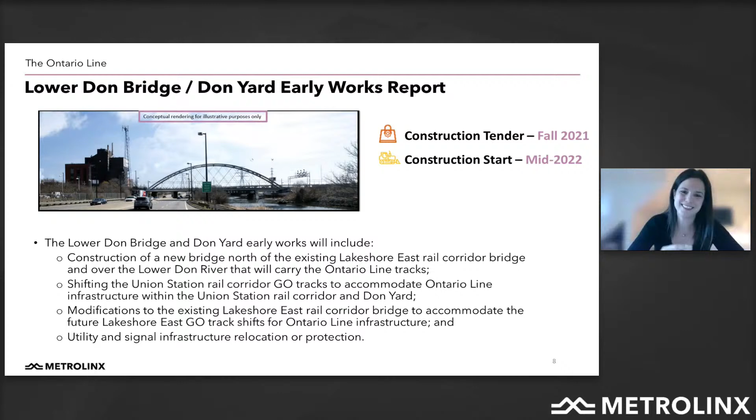The image here is the Lower Don Bridge, which clear spans, actually quite interestingly, from the East Harbour, which you see on the left-hand side of the image. We're looking south along the Don Valley and the Don River here. And on the right-hand side, there's the Don Yard, which you're familiar with. This is a tied arch bridge is what's being proposed. It's a 108-meter clear span.

And the work that's supposed to start in sort of mid-2022, kind of April-May time period, is currently what's scheduled, is the bridge abutments to support this bridge. And we'll start on the east side first and then move to the west side.

And in concert with that, there's some modifications to the tracks and signaling system within the Don Yard itself to accommodate the Ontario Line tracks as they come in, and the portal that goes underground at that point, and also modifications to Lakeshore East of the bridge location to allow the tracks and the construction of East Harbour Station to commence. So next slide, over to you, Carrie.

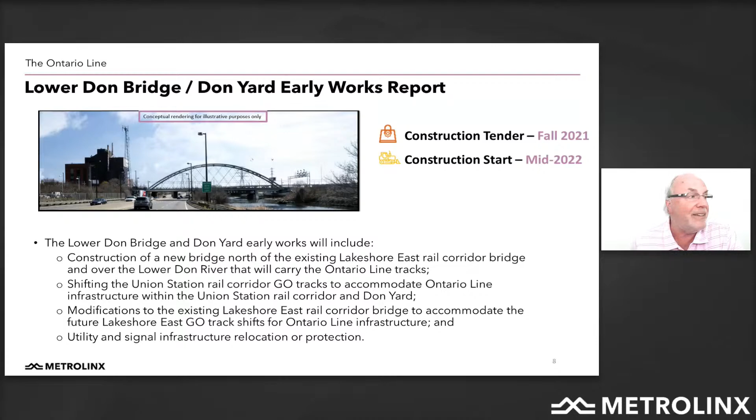Thanks very much, Richard. So as I mentioned, the draft Lower Don Bridge and Early Works EA report was just released this week for public review and comment. And so similar to any EA report that you might be used to seeing, it provides that overview of the proposed work. It assesses the project and all of the environmental disciplines you see here. And it outlines our commitments to mitigation and minimizing any potential adverse impacts.

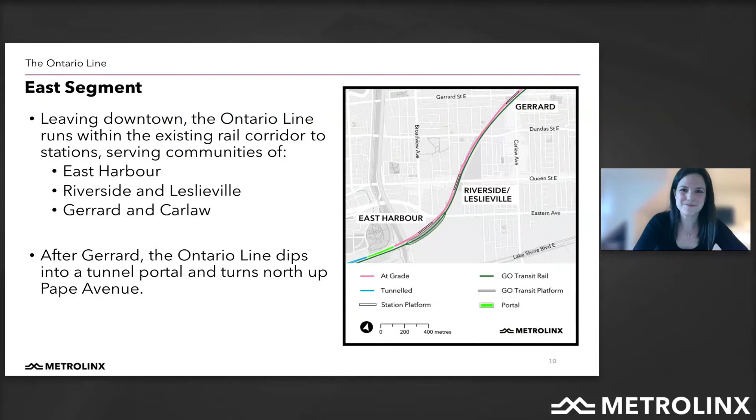So we will be taking comments and feedback on the report for 30 days. So really encouraging everybody to check this out and provide us with your thoughts and comments. Thanks very much. Malcolm, back to you. Thank you very much, Carrie and Richard.

So tonight we're talking about the east segment. It comes out of the ground in the Don Yard and goes across the new bridge at the Don River and goes into a new elevated station at East Harbour, then starts to turn north and goes towards the Riverside Leslieville Station and continues in the joint corridor to Gerrard Station, where it dips and goes underground, continuing up north to Pape Avenue.

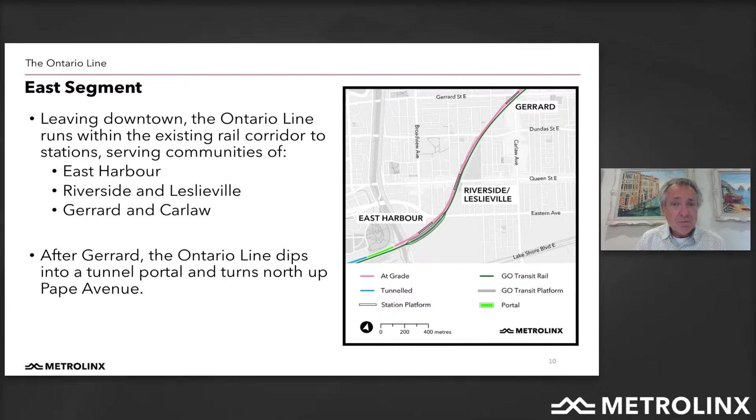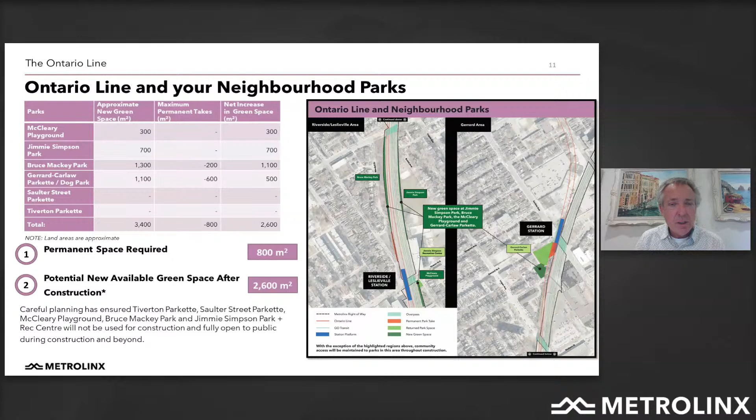On the next slide, we've got some news about the parks. Our construction team has done an incredible amount of work rephasing and restaging the work that's going to be conducted in the corridor to be able to construct most of it from inside the property lines that we have. Each individual park has a net new increase in space. And the total net increase in space is almost 2,600 square meters, which is the equivalent of 2 Olympic-sized pools.

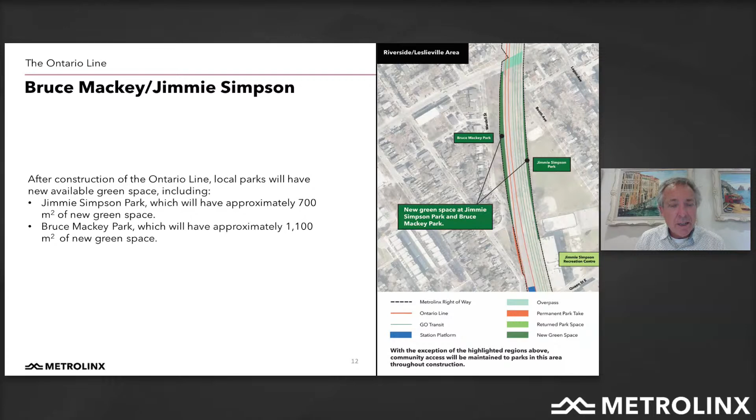On the next slide, we have Bruce Mackey and Jimmie Simpson Park. In Bruce Mackey Park, we'll be increasing about 1,100 square meters of new green space. And that's equivalent to almost an Olympic-sized pool. In Bruce Mackey Park, the additional space varies, but it's up to 7 meters wide, widening of the park.

In Jimmie Simpson Park, we have approximately 700 square meters of new park space, and that is about 3 meters wider generally down the length of the park. We've also installed some survey markers inside our fence to show where the new retaining wall is going to go. You can visit this. They're currently only on the Bruce Mackey side of the alignment, but we'll be soon adding them to the Jimmie Simpson side of the alignment too, as well as at the McCleary Playground.

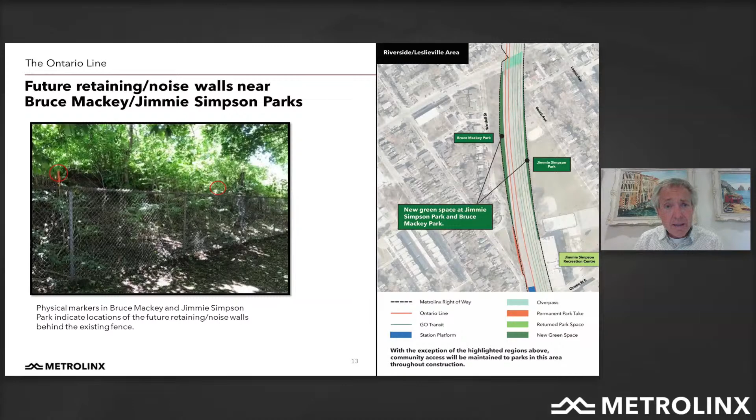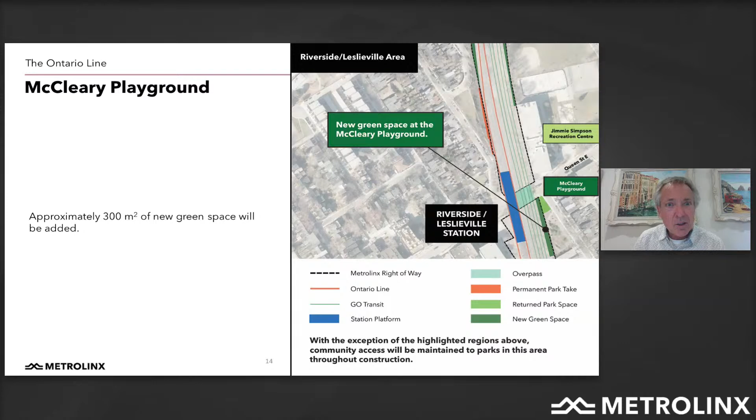And that's approximately equal to a tennis court and a half being added to that park. Next slide. Up at Gerrard-Carlaw Parkette, this is where a station is. And at this station, we're going to be needing a large part of the dog park during construction. But at the end of the day, when we hand everything back, that park is actually going to be increased by 500 square meters, which will create new spaces for programming.

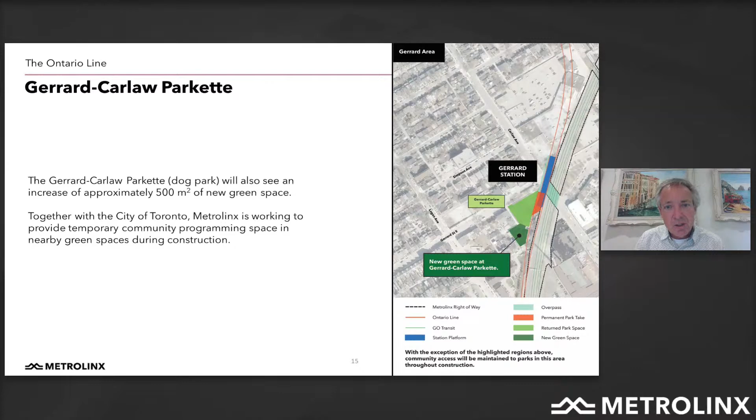In response to this, we're working quite closely with City Parks and Forestry to try and identify other adjacent parks where we can move some of the programming that was in the Gerrard-Carlaw Parkette temporarily to the new adjacent park to make sure that the programming spaces are still available to the community. On the next slide, I'll pass this to Richard.

Hi, Malcolm. Thanks very much. So we're really excited about this particular development. As you know, there were a lot of questions about how we were going to be able to build from inside our corridor, and the very exciting part of this development is that we won't be impacting the park spaces at all. We are actually building entirely from within the corridor, and I'll go on to share with you exactly how we plan to access the corridor without impacting the park spaces.

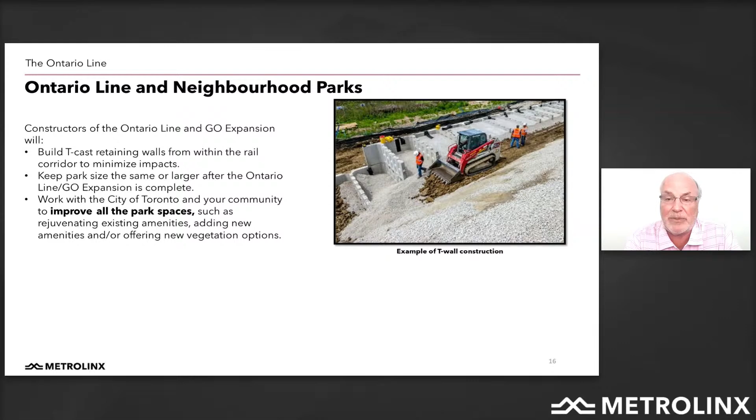In this particular picture, you can see what we call precast T-walls. If you imagine you were standing in the middle of the railway corridor, obviously with your safety gear on, you'd be looking at the construction going on, and you can see these precast T's, the T is lying down on its side. Basically, we put the aggregate around them, and they're self-supporting in this formation, and work for the railway, supporting the railway loads that will be incurred. And we can put noise walls on top of these. Essentially, all the work is being done entirely from within the railway corridor, as per this example. Next slide, please.

So obviously, to do the work from inside the railway corridor, we have to access the railway corridor. As you can see on here, we've marked 8 locations where we'll be needing to access the railway corridor. If we start from Eastern Avenue, at the far left-hand side, bottom of the image, you'll see items 1 and 2, which are basically 356 Eastern Avenue, a storage warehouse there currently, and some access that goes up onto the railway corridor just behind the Saulter Street Parkette using part of the existing lane that's there.

But I should emphasize that all the access is from main streets. We are not accessing any of the construction works from local residential streets. So in this case, we're coming off Eastern Avenue on the west side, which is above the corridor in this picture, and then there's a similar access on the other side of Eastern Avenue by Dibble Street. Number 3 is at Queen Street, you can see the access coming off of Queen Street. And again, not touching the McCleary Playground, but just using an area in that location for the expansion of the Queen Street Bridge. We're rebuilding the Queen Street Bridge.

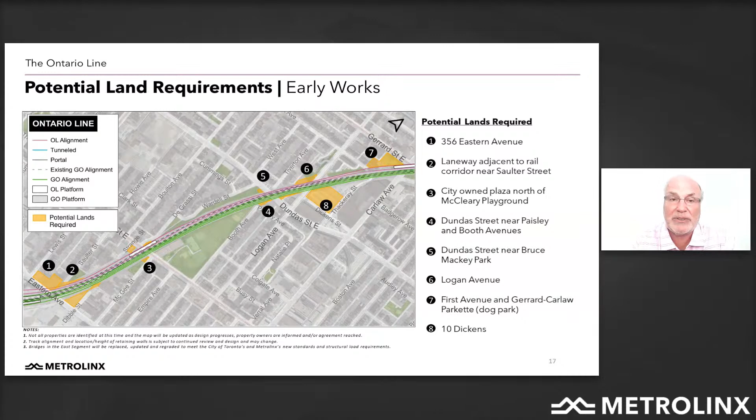Up at Dundas, you see 4 and 5, which are access points there. Number 6 is access from Logan. Number 7 is the Gerrard Street Parkette that we talked about. Number 8 is the laydown area for this construction, and that's an existing parking lot on Dickens Avenue. So we can dive into these in a little more detail. I think there's slides for each of them. So we go to the next slide.

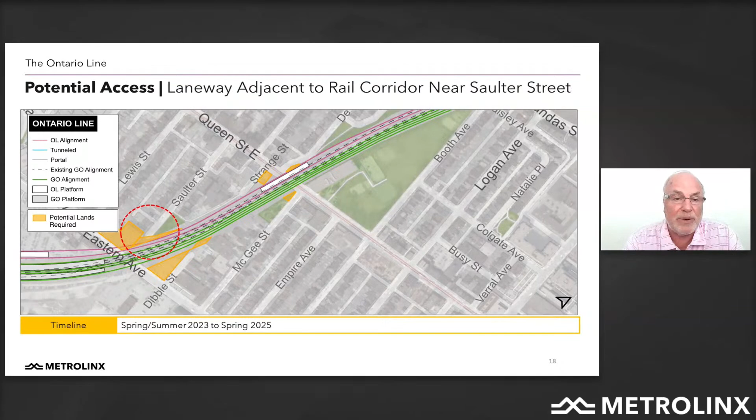Here's that access off Eastern Avenue, and you can see the detail there with the red circle. On either side of the railway corridor, there'll be ramps that basically build up, and the trucks would access onto the railway corridor at each of those points. Again, from Eastern Avenue, main street only. Next slide. This is a quick example of what you would possibly see, and it's hard to see because it's basically that thin white line that crosses the image from left to right.

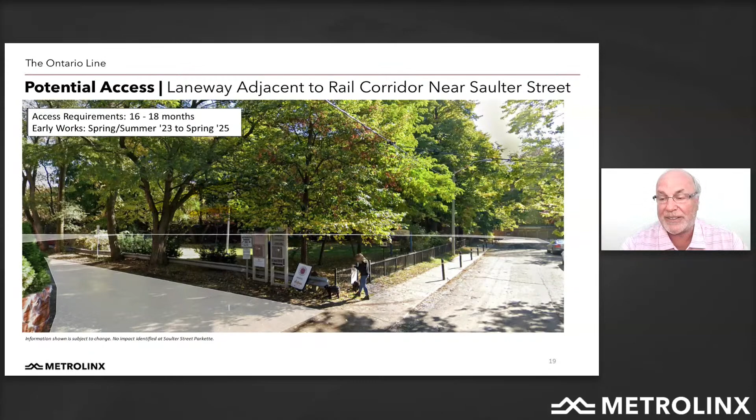And it's basically coming, the trucks would be coming from the right-hand side of the image and climbing up onto the railway corridor behind the Saulter Street parkette. I do have to mention in this image, I noticed an error that there's a white shading in the lower left-hand corner of this image, and that's incorrect. So that area by the woman walking her dog and by that signage there is not required for construction. And this was a slide obviously taken from an earlier version before we managed to figure out exactly how to get onto the corridor without affecting any local infrastructure.

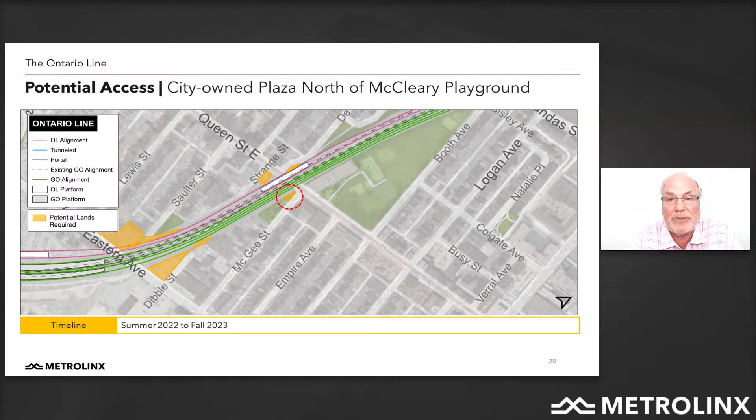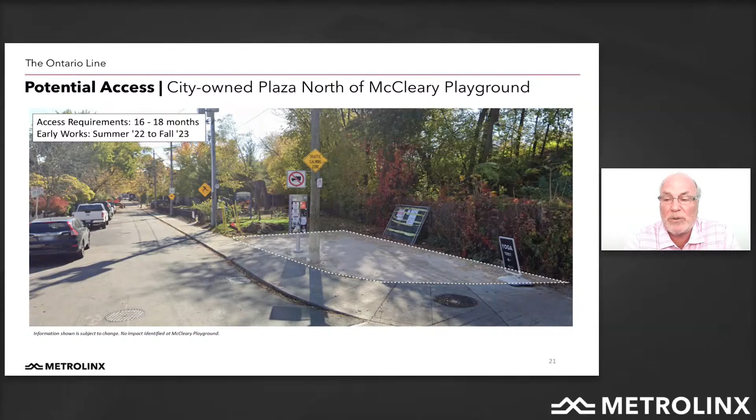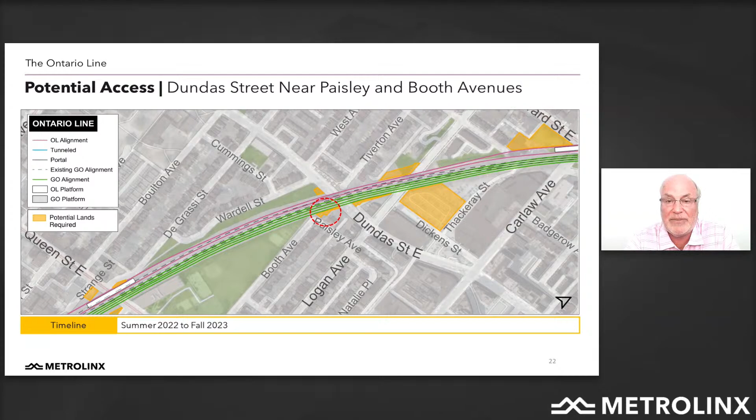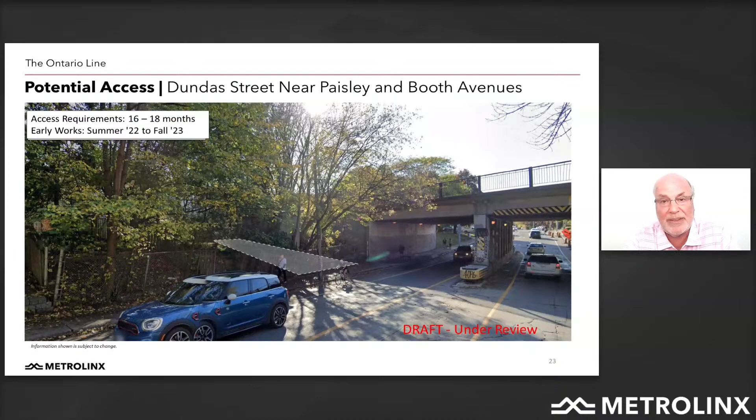Next slide, please. So here we are up at Dundas, and this is access onto the east side of the corridor, so we do not impact Booth Avenue or Paisley Avenue or Jimmie Simpson Park or the Rec Center. None of those facilities will be impacted by this construction, and the Ball Diamond and all the other facilities in the park will remain open at all times. The access here again is from Dundas Street, and the one that is red circle is a ramp onto the corridor, and the one on the north side or the upper side of the corridor is basically for the Dundas Street Bridge. Next slide. And you can see the image of the approximate location of the access up onto the corridor at this point coming off of Dundas. Again, you can see the work here is scheduled from the summer of 22 to the fall of 23.

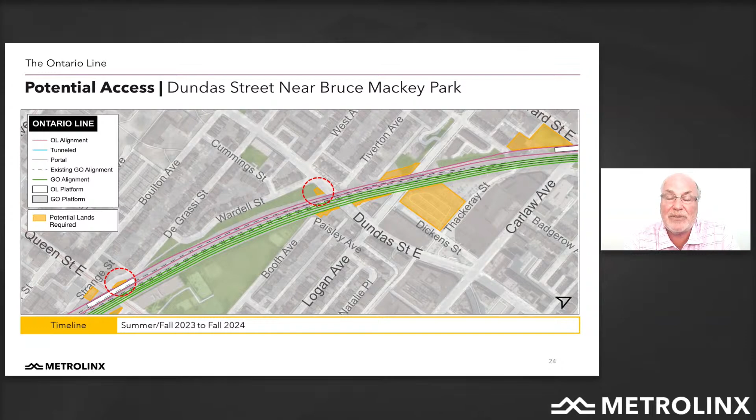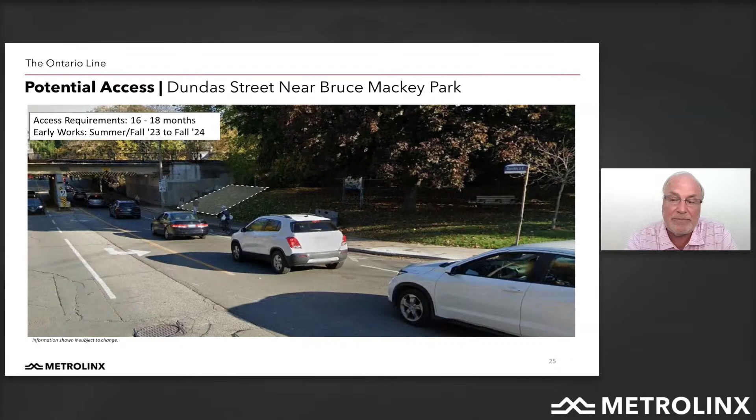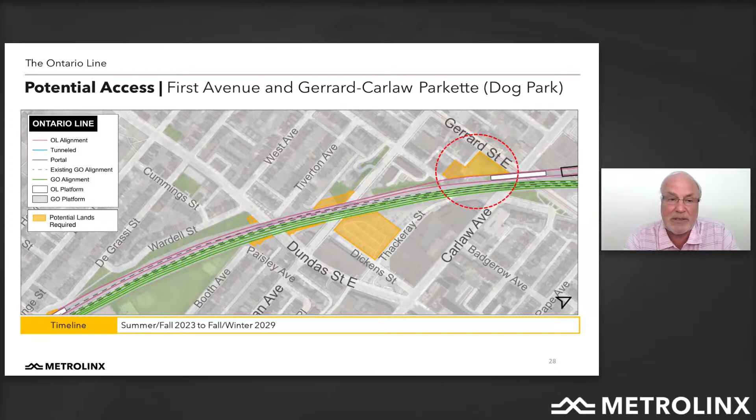Next slide, please. And then we come to the Gerrard Carlaw Parkette. We're talking about access here from fall of 23 through the winter of 29, and that's really for the construction of the station at this location. So if you move on to the next slide, please. You can see that what we're talking about here is acquiring this property. I believe this is on First Avenue and it's shaded red in this particular case. And so we have two sets of works here, the early works, which is the regrading of the corridor and the preparation for the 6-track configuration, goes from the fall of 23 through the fall of 24, followed by construction of the Gerrard station from fall of 24 through the fall-winter of 29. Again, you can see the white shaded area here, which is the Gerrard Carlaw Dog Parkette, and you can see the periods we've been talking about there. The intention is that this land, the parkette, together with the other land from First Avenue, will be put together in a brand new park that will increase the size of this area. So next slide, please.

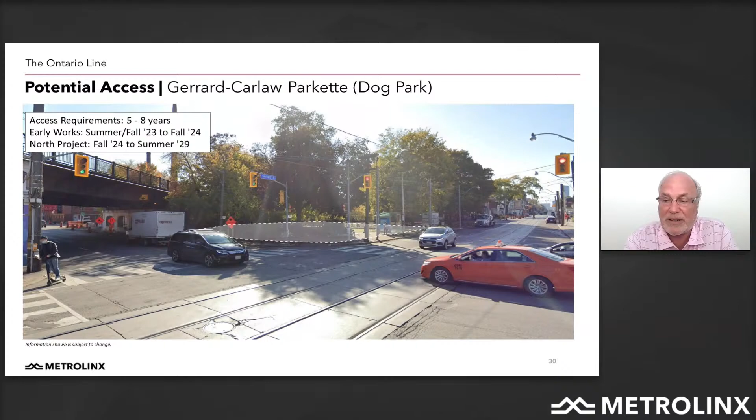So this is East Harbour, and I think this is back to Malcolm. Thank you very much, Richard. That was a very comprehensive outline of the construction access.

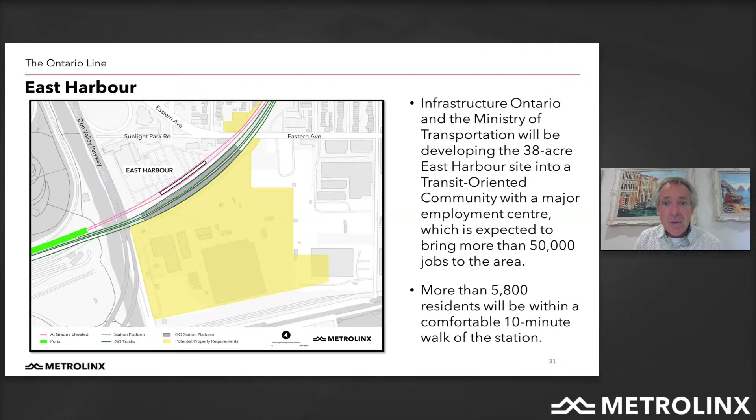Thank you. So this slide is speaking to East Harbour. It's a vital city building station for us. There's going to be more than 50,000 new jobs stationed here. More than 5,800 residents will be living within a comfortable 10-minute walk of this. And Infrastructure Ontario and the Ministry of Transportation are working together to develop this East Harbour site and station into a major station where GO Transit will be stopping. All of the 4 lines will have the capability to stop here. And we're expecting a great deal of transfer here, up to 5,600 or 8,600 transfers during the peak hour and 14,900 people to use this station during the peak hour. This is actually our second busiest station in the alignment. On the next slide, we go to Leslieville Riverside Station.

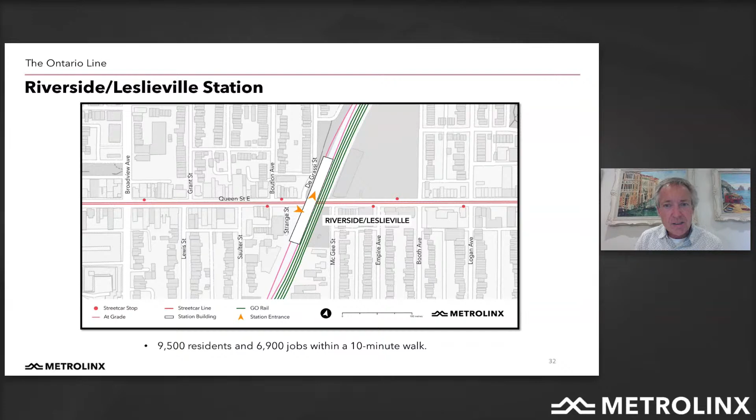Here we have an elevated station that's going across Queen Street. We're expecting 4,000 people during the busiest hour to be using this, as well as 2,800 people transferring from the streetcar during its busiest hour. It's important that we have this station here because the interconnectivity of the surface transit network is vital to good network transit operations.

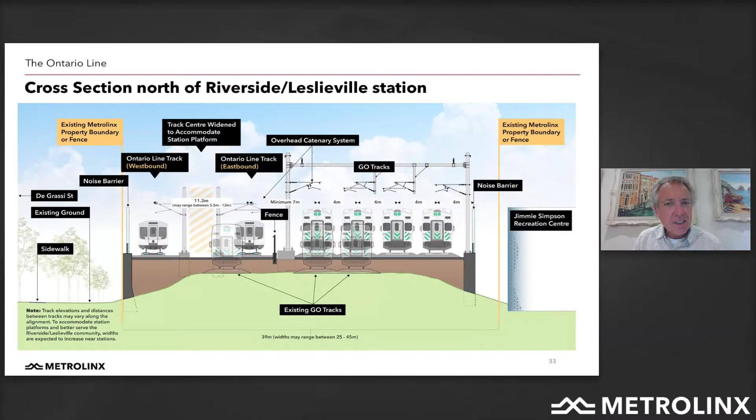On the next slide, we have the cross section of the alignment through Jimmie Simpson Park. And this shows the track spacings, and then ghosted into this is also the existing GO trains and where they are situated in the corridor. So, take some time when you're going through these slides at home and take a look at this. And if you have any questions, make sure you get back to us.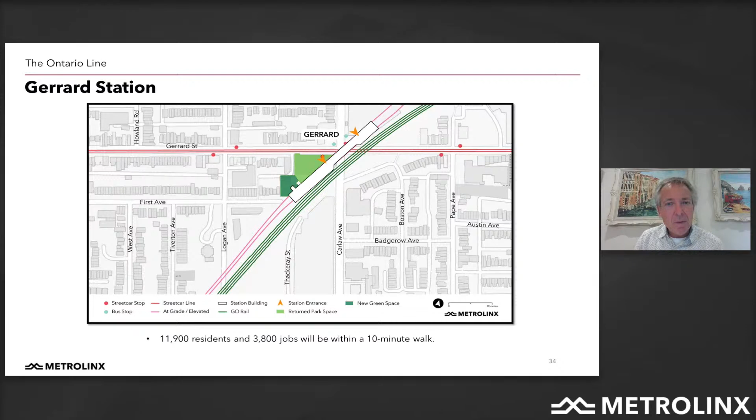And as I said earlier in the presentation, we're working quite closely with Toronto Parks and Forestry to identify other local parks where we can move the programming of this space during construction to be able to make sure that all the constituents and people in this area have the same service.

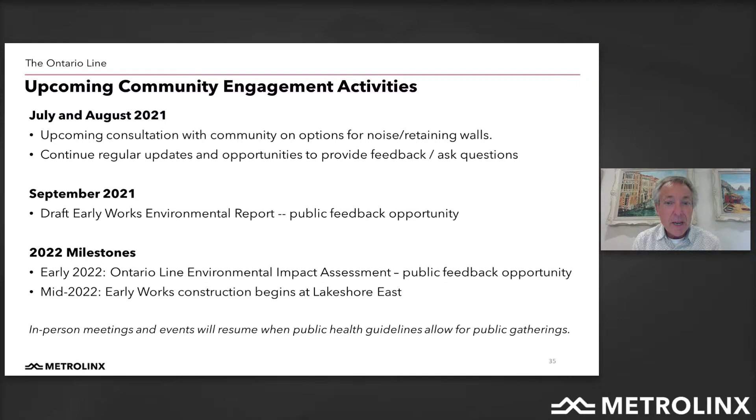On the next slide is our next community engagement activities. Through July and August, we have upcoming consultation with the community on the options for noise retaining walls. And we're going to continue this regular update. And we're actually very excited that we're expecting soon to be out of this COVID environment and be able to meet in person. In September, we're expecting the draft early works report to be issued. And then in early 2022, the environmental impact assessment report and construction to start in mid-2022.

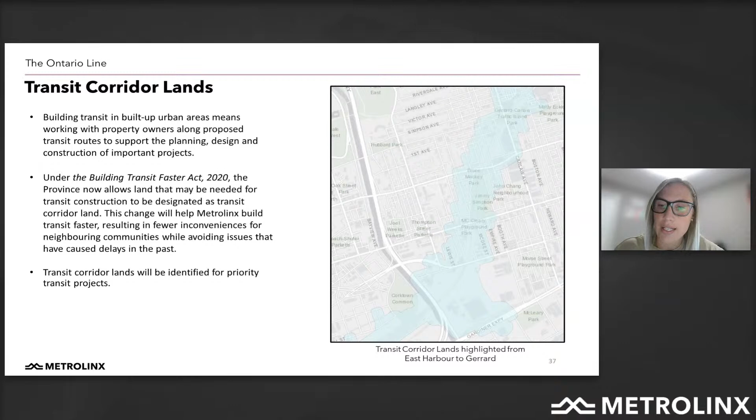So the transit corridor lands really is the crux and the focus of the Act. Under the Act, we are required to designate this area, what we would call the transit corridor lands. And this is the area where the provisions and the permitting of the Act apply to. So a common question that we've heard is, how did you determine what the transit corridor lands are? So Metrolinx undertook a technical exercise where we identified the spatial requirements for what the transit corridor lands would look like. And this was done in a very sequenced approach. And it is here on the slide, so we can just go through it a little bit quickly.

So the first thing we did is we identified the land needed for the tunnel and the at-grade alignment and the station infrastructure. Then we applied a 30-meter safeguard around that space. Then after that, we went back and we made more manual refinements to really specifically look at what the project needs would be. And so this looked at more of construction means and methods. So some examples would be area needed for access points or laydown or staging.

We also considered projects that could potentially overlap with this area, or maybe space that we need to get onto to do more studies. And then after that, and a lot of you've noticed and pointed out too, there are some areas that are even wider. These areas where we've expanded it even further, we call bump outs. What's happening at a bump out is the alignment is intersecting with a road intersection, and we're trying to accommodate for the ripple effect of utility work, utility relocations, or potentially traffic impacts. So we've expanded out to include the entire road intersection in those spots up into the adjacent intersections.

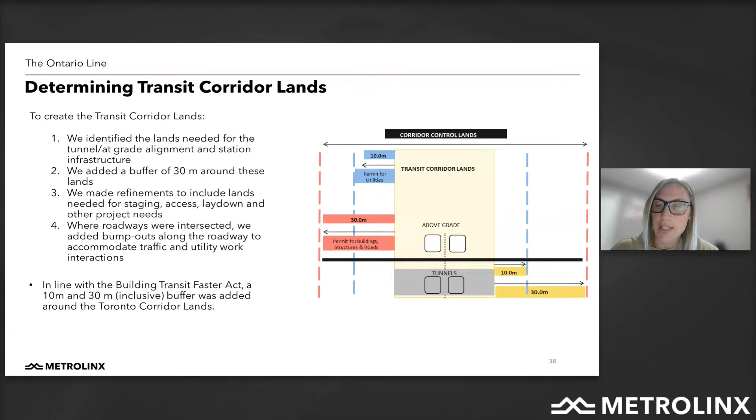So all of these different rationale points are really what make up the core project needs, and that's what we've called the transit corridor lands. From the edge of that, we've added a 10-meter buffer to account for utility permitting. And from the edge of that, we've added another 20-meter buffer to account for permitting for building and structures. So in total, the transit corridor lands plus the 30-meter buffer is the area that's designated under the Act. On the next slide, please.

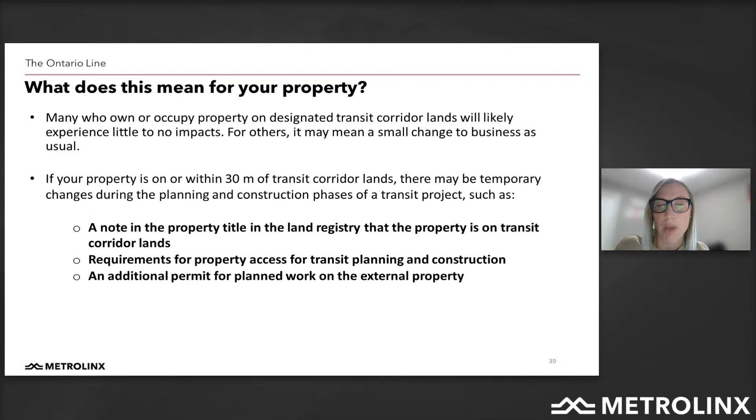So what does this mean for your property? We really do anticipate that there will be little to no impact for most property owners and little disturbance to their everyday life. There are 3 implications, though, that we've noted here on the screen in bold. The first one is the main implication, and the latter 2 are just potential implications. I'm going to go through each bullet in more detail. They're each on a slide. So on the next slide.

Okay, so for the first one, the temporary notice on title. The designation notice will be registered on title and you can view it through a title search in the land registry office. But we do want to reiterate that the notice is just for awareness or informational. It's to notify potential future buyers that this property is in close proximity to a transit project. The notice itself does not restrict or prevent anyone from renting, leasing, or selling their property, and we really anticipate it to have little to no impact on property value.

The other thing about the notice is that currently the Act applies to planning and construction. So once those phases are complete, the notice will be removed. So next slide.

So the second implication is that Metrolinx may need to access property for a specified purpose. We've identified 2 main circumstances that this could apply to. The first would be what we would call a preview inspection. This is where Metrolinx may need to enter property to do something like a visual assessment or a site survey, or to support some environmental due diligence. This could include collecting a water or a soil sample. The second circumstance could be where we've identified a known obstruction that we know will pose an interference to the transit project.

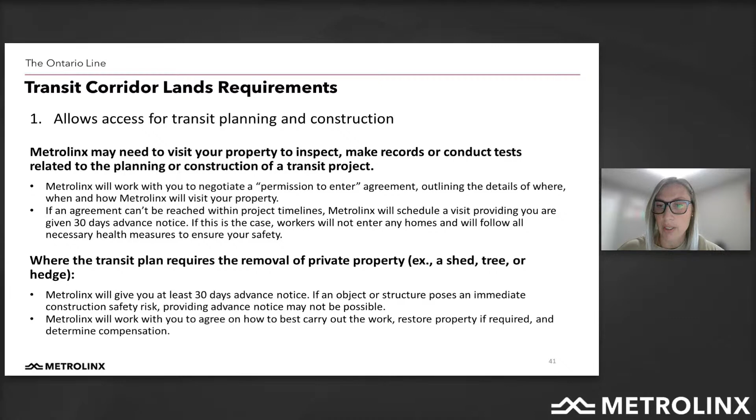Next slide. So the third major implication is the permitting requirement, which I think most people have heard about. If a property owner does intend to build or change a building or structure on their property, we are requesting that they come to us, work with us, and reach out. There is the email address on the screen. Some examples of projects where a property owner might need to obtain a permit from Metrolinx could be a home, deck, pool, or shed. We really think it would be these large exterior home renovation projects. Interior renos do not need to come to us for a permit.

It's also important to note that Metrolinx has always been an external commenting agency for these types of permits, but we've always worked with the municipality as our main conduit. So now we're just asking that property owners come work with us more directly. If you think your project falls in one of these categories, please reach out, just have a conversation with us, and we can initiate a review with you.

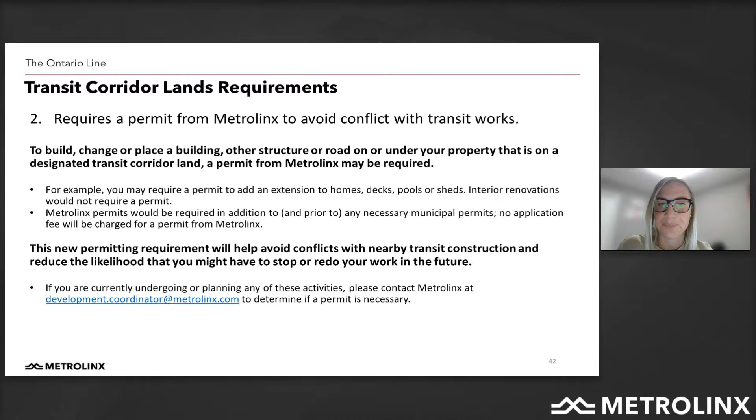Next slide. So how will I know if my property has been affected? So it is a requirement of the Act for property owners to be notified once the project is in effect. So Ontario Line did become in effect in early June. So we released notices shortly after. So most residents should have received their notice by now in the mail.

You can also double check if there's any uncertainty. If you're not sure if you got your notice, you can either reach out to us or you can check our website. We have a pretty user-friendly application where you can search for your address. There is a couple caveats where if you live in a condo building or an apartment, you wouldn't have received a notice. We just targeted condo management boards and apartment owners solely and asked that they work with their normal communication channels to let tenants know.

And then I know I've already mentioned it, but we just want to reiterate that just because you received a notice, it doesn't necessarily mean in any sort of way that any of the types of things I've mentioned before will apply to your property. So if there is a situation where we do need to access or use your property in any way, that will all be handled through a separate notice on a case-by-case basis. And I think this segues nicely into some more property implications. So I'm going to hand it over to you, Ranjit.

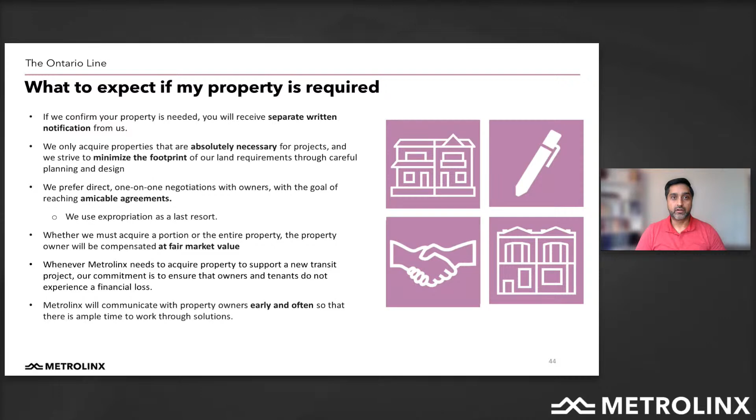In some circumstances, we may leverage the expropriation process, but that is done as an absolutely last resort. So regardless of the approach that's taken, whether it's expropriation or whether it's an amicable deal, the owners or tenants are compensated based on a fair market value. And the intent of that is really to make sure that owners or tenants are not at a financial loss. Next slide. I think that's back to you, Malcolm.